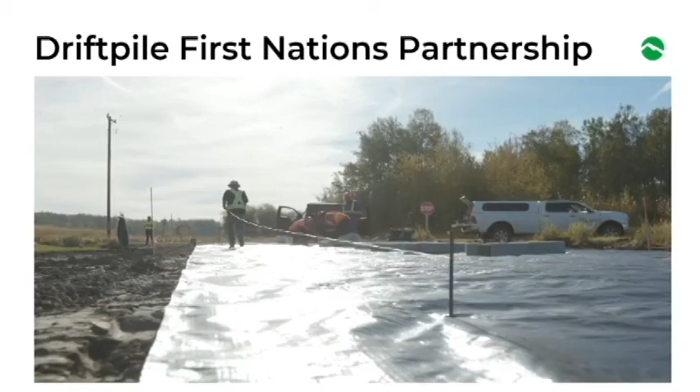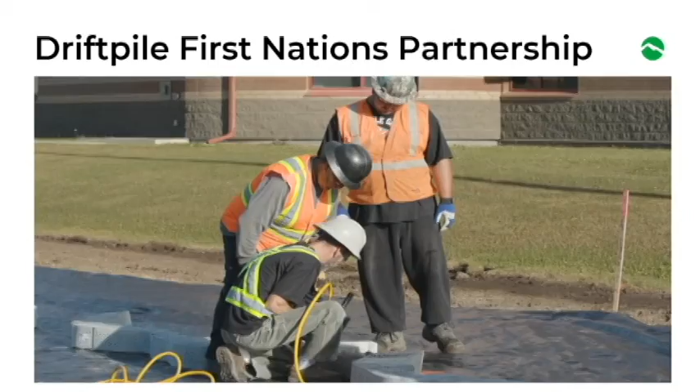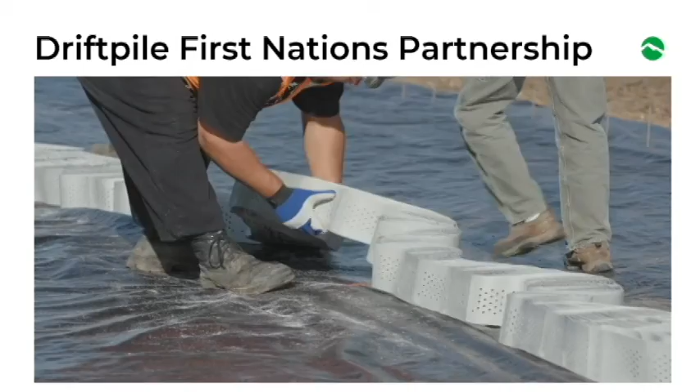With the partnership in Paradox. I'm also very excited with the thought that's going in for the making of the road that will be happening. The exciting part about it for me is just the maintenance and the cost of maintenance. Our membership are clearly aware of the cost of maintenance every year on roads and maintaining roads. And I'm really, again, going to say I'm excited about what it's going to look like 5 years from now, 10 years from now, for maintaining the roads for the nation. This project will definitely be something that I'll be looking at in years to come to see where we're at. So very excited about the opportunities with Paradox and very, very appreciative of the partnership and the respect that comes with that partnership.

So we're fortunate to have many partnerships within Western Canada, and we're looking at developing more partnerships out east. We all know that Indigenous communities, generally speaking, are in a lot of regions that are remotely located, so this technology helps to minimize costs for construction on the front end and on the back end. So assets such as roads are a big component of the way of life for our Indigenous communities and getting their critical services up there.

Also the last presentation on drones, it was very exciting to see that there's new technologies that are allowing them to get some of their resources over to their communities in a much more efficient and cost-effective manner.

So a little bit about the technology, specifically the technology I'm going to talk about, which is a tough cell or a cellular confinement technology. It's essentially a bunch of hoops or plastic cells that confine aggregate inside the cell to give added strength to that aggregate. It helps distribute the loads that are applied over top of it to minimize those loads that go down into the weaker subsoils that generally don't have the same bearing capacity that, let's say, sub-base layers or base layers have.

It's a cost-effective solution for both paved and unpaved roads. Some of the benefits of this technology, it allows for different types of aggregates to be used in road building that traditionally wouldn't be used. So for example, sand sometimes isn't normally used for structural layers in a road. If you take sand and confine it, you can increase the strength dramatically.

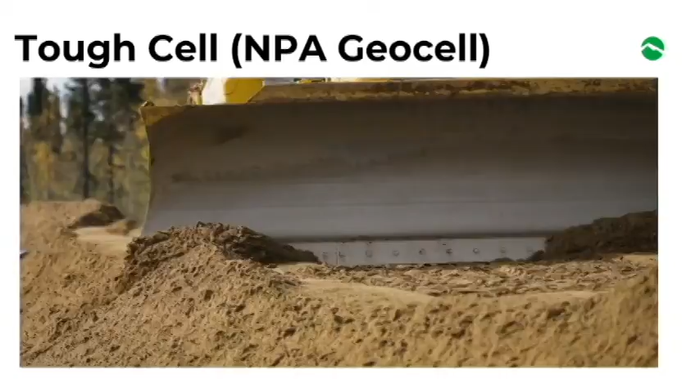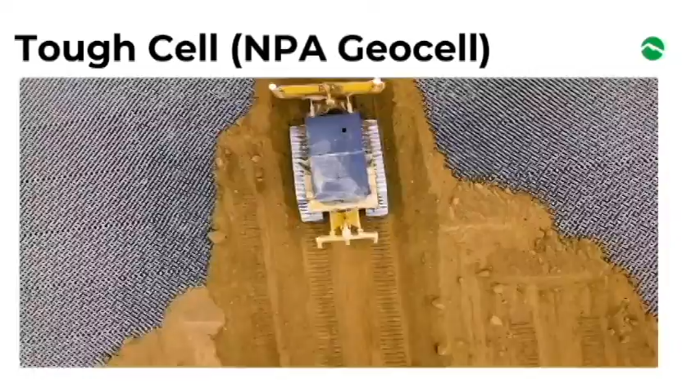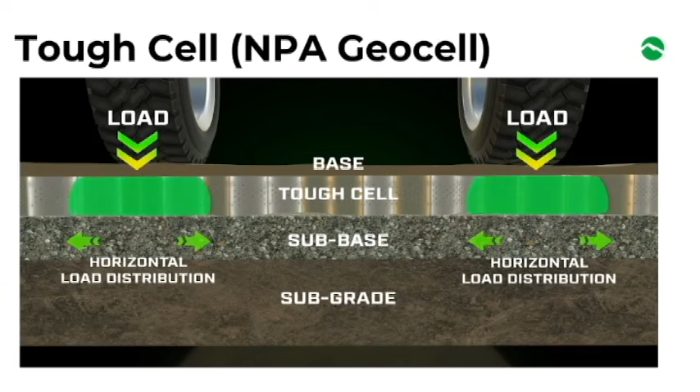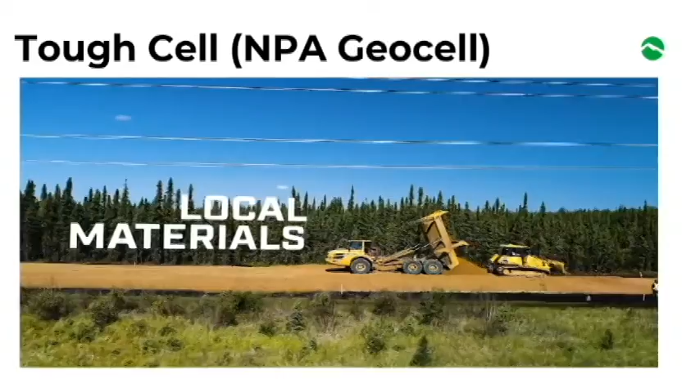The best things are built to last. When it comes to highly trafficked roads and load-bearing job sites, reliability is key. Tough Cell by Paradox is an NPA geocell reinforcement solution that can be used to build roads and surfaces that last as long as you need them to. Tough Cell is an expandable web that spreads out to form a honeycomb of vertical pockets. The pockets are then filled with a granular material, like local sands, recycled asphalt, or mixed aggregates. Once full, the cells are then compacted. With the conventional road structure, the load weight spreads downward and in all directions. This can form ruts and cause degradation of the subbase layers. On a road built with Tough Cell, the granular material presses against the sides of each pocket, and most of the vertical stress is distributed horizontally. The material doesn't shift, the road remains strong, and any weak spots on the ground beneath the Tough Cell layer are bridged. Tough Cell can be used to build not only roads, but also rail, paths, earth stabilization, and paved and unpaved infrastructure. Compared to a conventional road, Tough Cell requires less material and a shallower depth of material to fill in its geocells. Local materials can be used, so there's no need to constantly move gravel or sand from somewhere else. Tough Cell builds take less time, wear less and need less maintenance, resulting in a dramatic reduction in CO2 emissions. Tough Cell is a smarter, stronger, more responsible choice for your next build. So when you need to be on solid ground, choose Paradox.

What we're trying to do is minimize those forces from reaching the weaker subgrade soils. So if you can minimize those forces from reaching those weaker subgrade soils, generally speaking, you're able to extend the life of that pavement and reduce long-term maintenance. We often say roads wear down from the top, but they fail from the bottom up.

So certainly I've spoken to various community members in Timmins. They're like, oh, you got road solutions, that's great. We've got these potholes everywhere, what can you do? Unfortunately, with those problems, you can either do a full depth reclamation, which means you excavate all that poor material out and rebuild it from scratch, or you just keep putting Band-Aid solutions in with patching it, and it'll continue to happen.

So this solution will allow you to provide a longer, more durable road that requires less maintenance, and when there is maintenance required, you're trying to avoid that full depth reclamation, so you just need to surface dress it on top. It's used in multiple applications, from road building, slope stabilization, railway ballast foundations, intermodal yards, reservoirs and landfills.

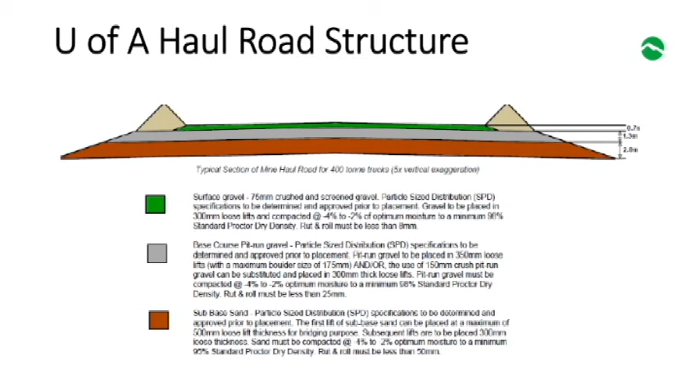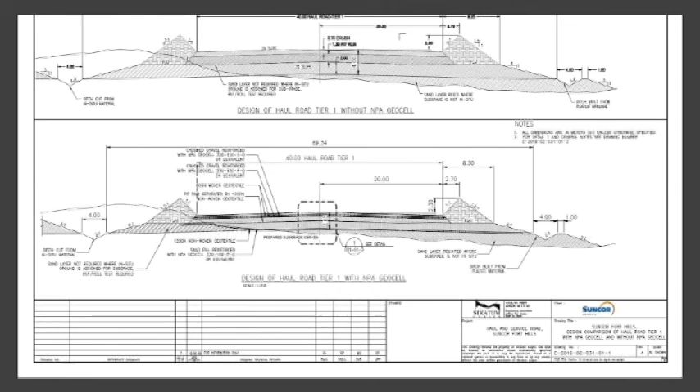So there's a requirement for various types of well-graded aggregates. And what we were able to do is now take, on the upper picture here, or in this design drawing, you'll see the standard design. We're able to cut that overall thickness down from 4 meters down to 2.65 meters. On top of that, we were able to use a lot of their overburden materials that they would normally dispose of inside of the cells, so they can use what would normally be trashed and use it inside the cells to actually build the road. So it worked out really well.

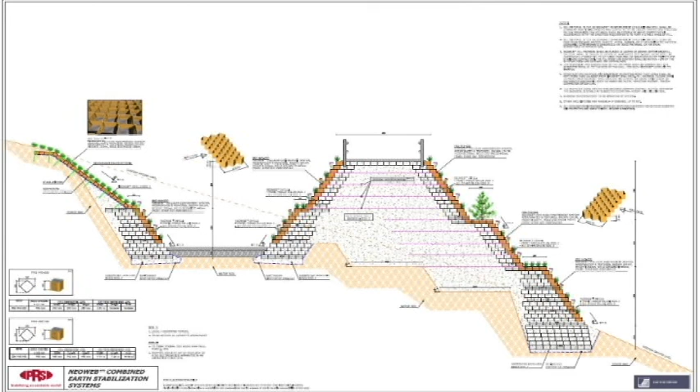Here's a pictogram of some various applications that you can use for bridge abutments, retaining walls, numerous applications. This is a project that we did for one of our partner clients in northern Alberta. They needed to build a permanent access route to an old compressor station that they were expanding to meet the demands for natural gas transmission throughout the area. We had to build an 11.5 kilometer road into the area to allow them to access the compressor station that we also expanded as well.

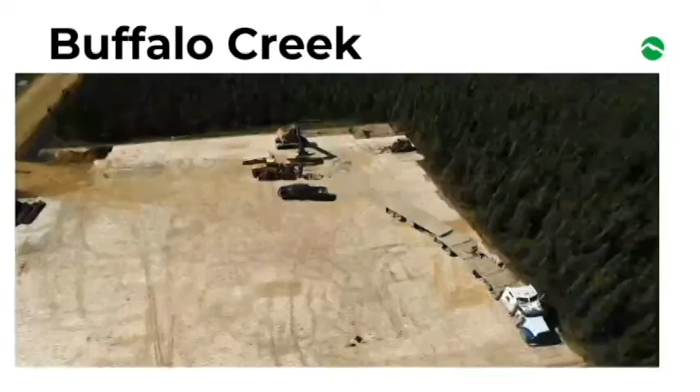So we are building a road for a very important client. The way we want to do that is we've got to cross muskeg in a pretty sensitive wetland area. To do a conventional road build here, you would have to excavate an incredible amount of material. And I don't even think it's possible, because how do you get out there with equipment to excavate that material? We're using geocell technology to build this road. With our methods and our materials, we can start at the edge and just start building the road and pushing it out in front.

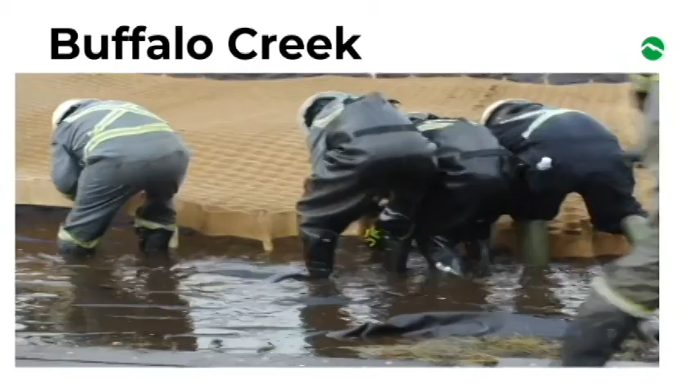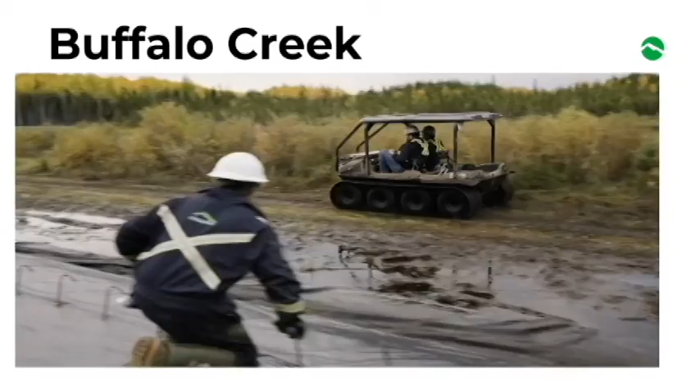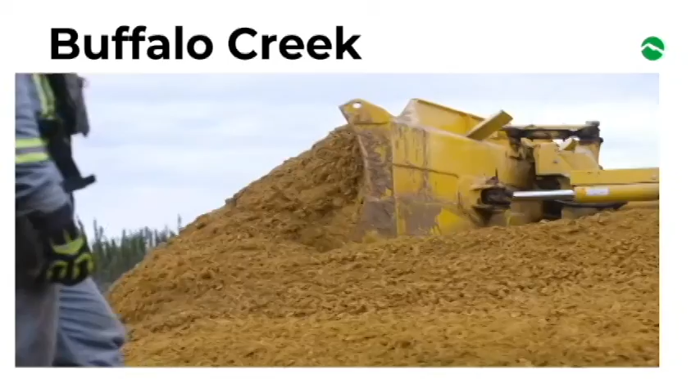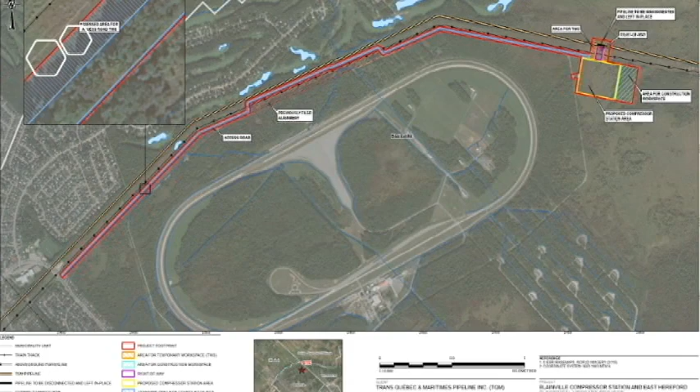So that was a really good project. This is the most recent one that I spoke of earlier, which was done in Quebec. Similar project, but unique circumstances on the project. We were limited to specific right-of-way requirements because there were housing communities, plus other private lands and utilities in the area. They also had very weak underlying clays that could be susceptible to major settlement over some of the loads that they were anticipating. So it was a unique, challenging job.

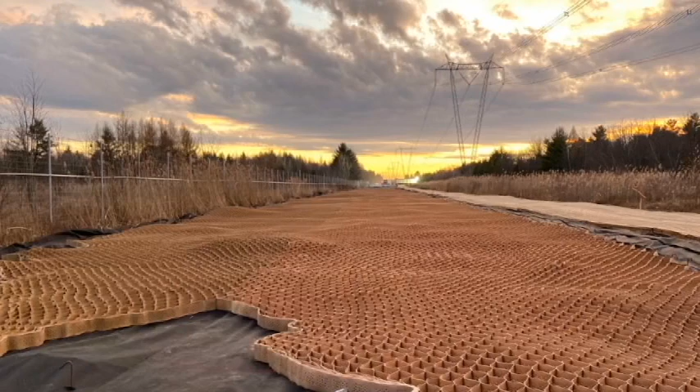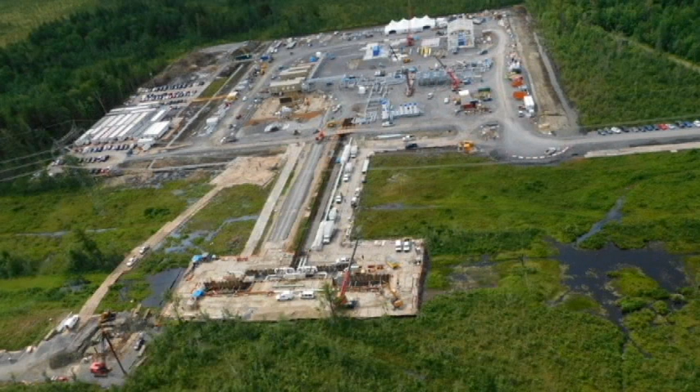Aerial view of it being done, and again, one of the benefits of this job was that we eliminated the need for them to excavate any of the natural materials. So reclamation on the back end would be easier as well, because they didn't have to re-import some of the natural materials or organics that were in place.

This one's a project that we're very proud of. We were part of the team that was able to put the Hudson Bay rail line back into operation in 2018. 2 years prior to that, there was some major flooding from some rain events that washed out numerous sections of the line, and we were asked to help in coming up with solutions that allowed the community to get land access travel back to the community. So we were tasked with repairing numerous sections of the line to allow some traffic to be used on that rail line again. Here's a quick video of that.

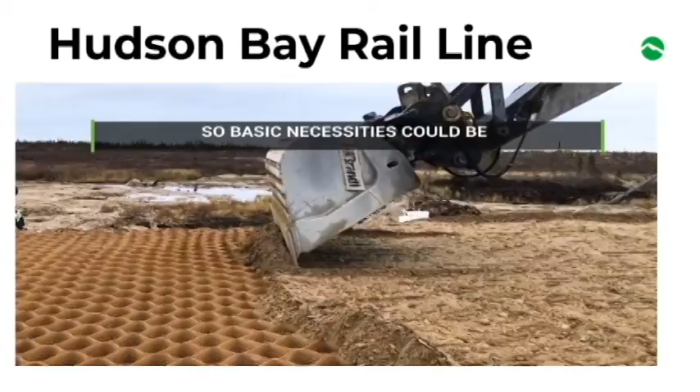One of the really challenging things about that job was the logistics just to get aggregate out on site. There's only one way in, and that's on that rail line. So we were able to utilize a lot of the washed out material that had spilled out back into the cells. We had on-site geotechnical engineers maintaining and ensuring that the gradation was right. So it was a big savings for everybody on the re-establishment of that line. This technology has been validated in numerous academic papers throughout North America and internationally.

So I just want to make sure that it's something that has been utilized numerous times in various municipal government regulations. Yeah, that's the gist of it. If anyone has any questions, I'd be happy to answer them. Thank you very much for your time.

Yes. You got everything else covered. Yes. So permafrost, I'm glad that you asked that, Steve. We're actually working with the University of Victoria right now on doing some studies on the effects of permafrost. Early indications are that it's a big improvement in allowing that permafrost to be insulated and keeping it frozen. So there'll be more to come. We're just waiting for some of that research information to come back from our academic partners, but early indications are that it's going to be a significant improvement to help insulate that material from thawing. Yes.